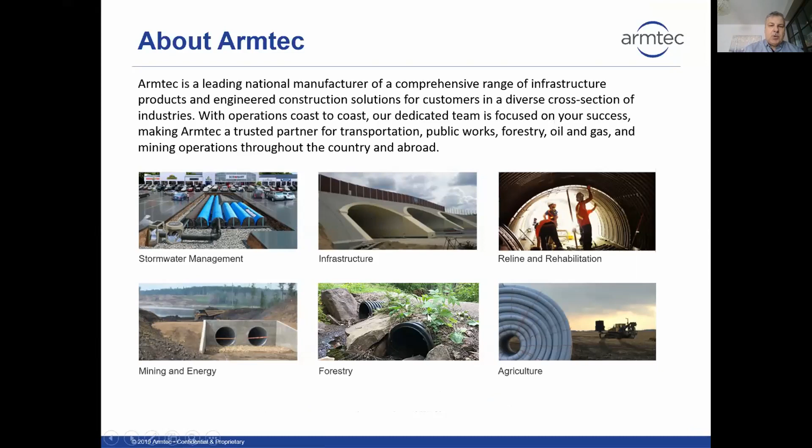Most of you know that we do supply culverts, highway guardrail, structural plate, and HDPE products, but today we're going to share specifically on our Bridge in a Box.

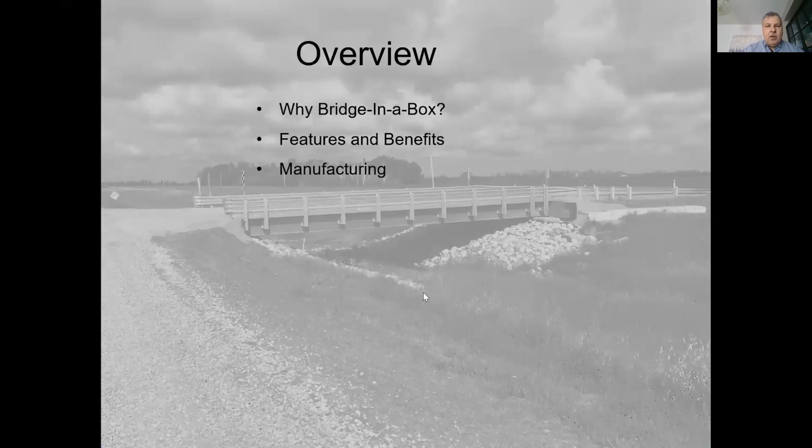Quick overview of what we're going to be sharing today: first, why Bridge in a Box, features and benefits. We'll talk about manufacturing, pre-engineered design, options, and meeting Alberta Transportation (AT) specs, as well as installation.

We'll share some case histories, touch on custom bridge capabilities, and lastly cover the RMA trade eligibility program.

So why Bridge in a Box? As we all know, aging rural bridge infrastructure requires solutions. Bridge infrastructure is deteriorating, and there are several bridges in our communities that need replacement or repair.

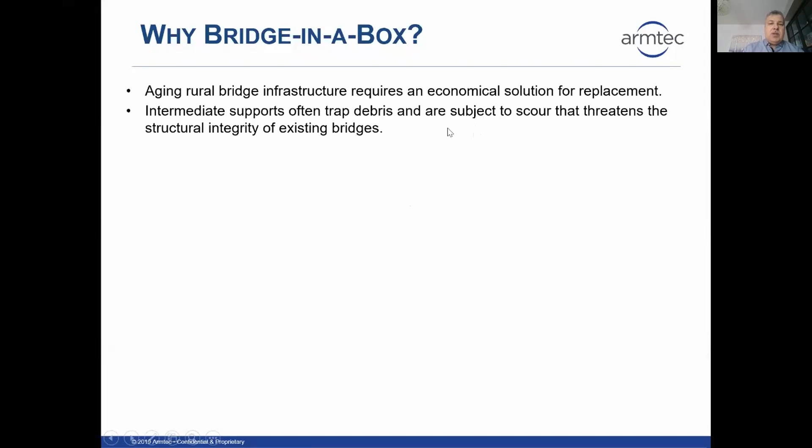We often hear from public works managers that they're dealing with issues where bridges have intermediate supports, and the clogging of debris and trees becomes a very expensive issue to deal with and resolve.

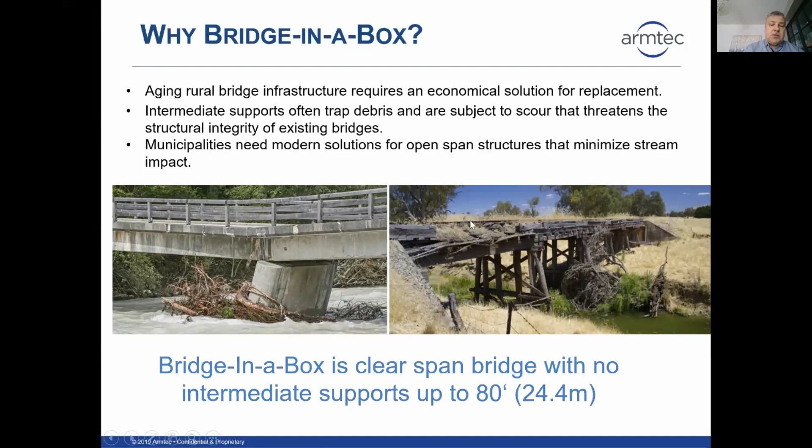Our Bridge in a Box is a solution we propose because it eliminates that intermediate support, with spans of up to 80 feet, or 24.4 meters.

Just to touch on some of the features of our bridge, the bridge is supplied in prefabricated steel modular sections. It also complies with the Canadian Highway Bridge Design Code. We can supply in single or double lane widths, and we offer various deck and railing options. Ideally, this bridge is suited for low volume roads.

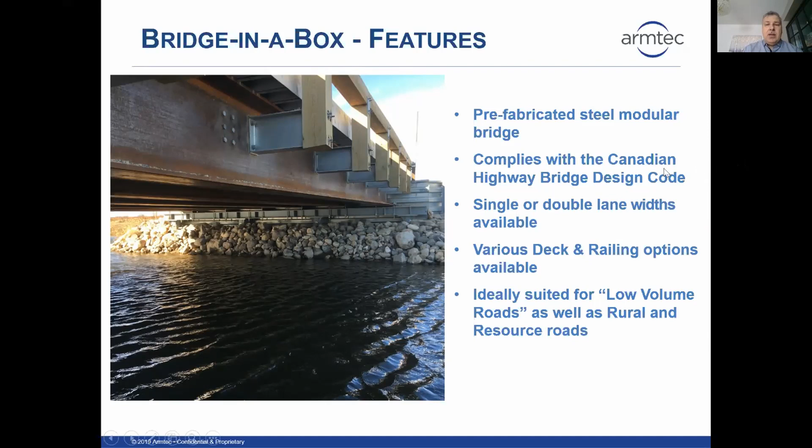It is not suited for major corridors or major roads, i.e. Highway 2 or Highway 43. So this is a perfect bridge for the RM and county membership.

Some of the benefits of our bridge in a box: because of the pre-engineered design, it will save on upfront design costs. We do the entire design of the bridge itself. It's modular and is shipped to site pre-assembled, so there's very little actual installation when the bridge gets to site. Typically, our bridges can be installed in one day.

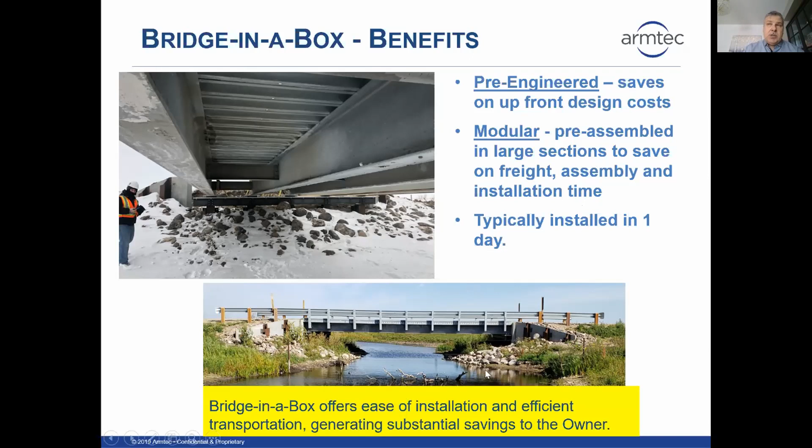The fact that it can be installed in one day eliminates a lot of need for heavy equipment and equipment sitting around at site for several days. It's efficient and generates substantial savings to the owner because of this.

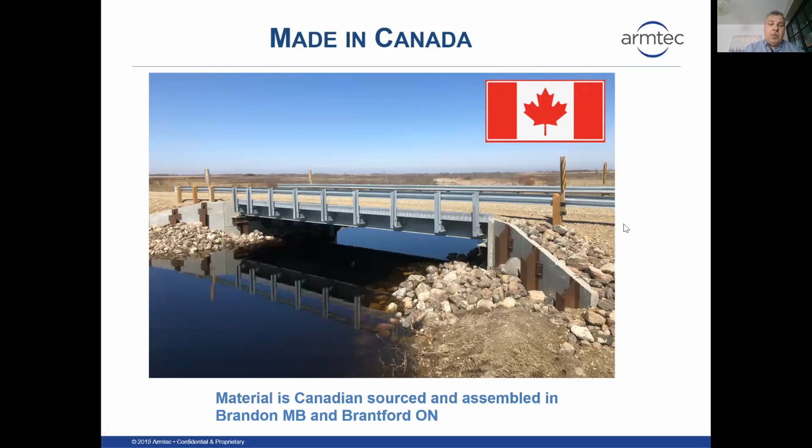The other fact we'd like to touch on is that our product is made in Canada. The material we source for our product is sourced in Canada and assembled in Brandon, Manitoba and Brantford, Ontario.

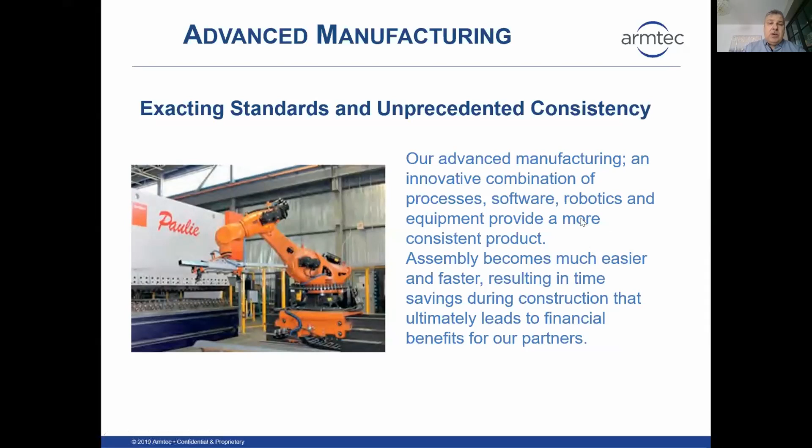We also use the latest in state-of-the-art equipment to manufacture our bridges. As you can see in the photo, this is one of our robotic machines used in the fabrication of our bridges. The standards we use are exact and unprecedented in the industry, and that's why our bridge can be manufactured and shipped to site with a very precise fit up.

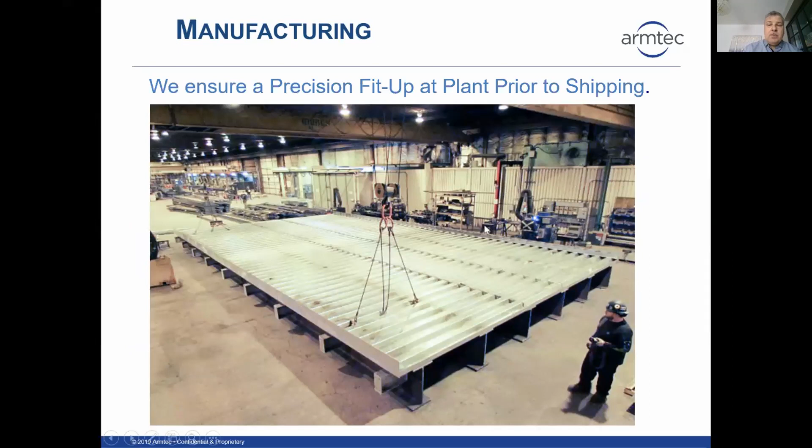We also do a test fit at the plant prior to shipping to ensure that the bridge arrives and is installed correctly to specifications.

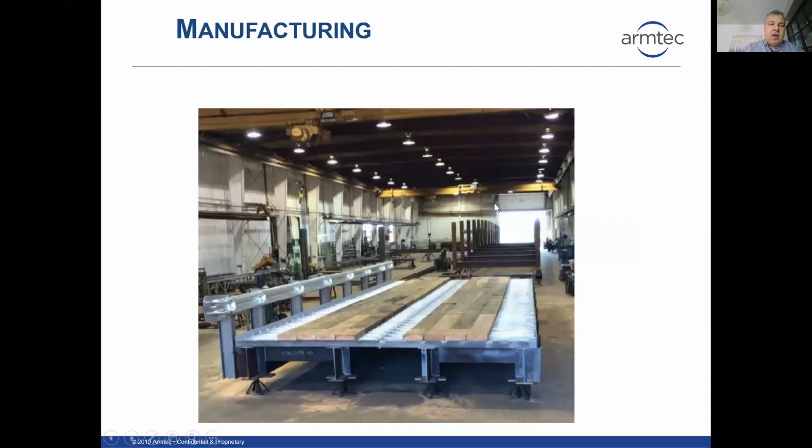Along with our manufacturing of the bridge, we also supply the highway guardrail on the sides of the bridge. This guardrail is also test fitted in our plants, again, for ease of installation on site.

In regards to design and engineering, Armtec provides in-house design engineering for our bridge. We can supply sealed shop drawings, complete shop drawings for your project. This slide shows some snapshots and screenshots of the different sections of our drawings that are supplied with each and every bridge we supply.

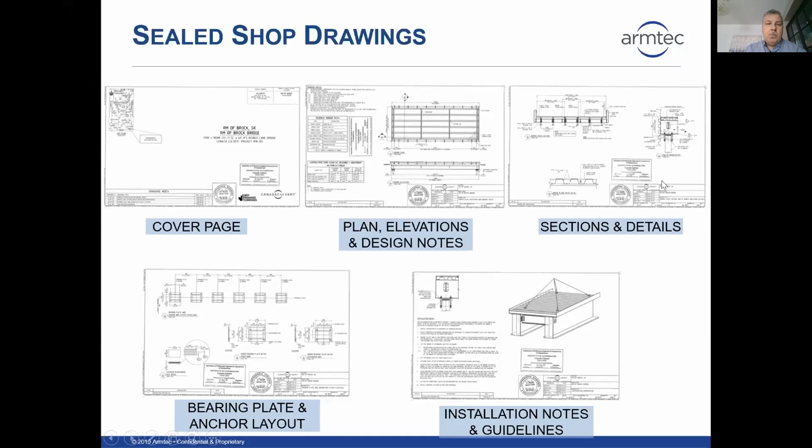Our bridge in a box also offers different options for decking. You can see the gravel on the side here. Also, concrete is another option, as well as asphalt or timber planks.

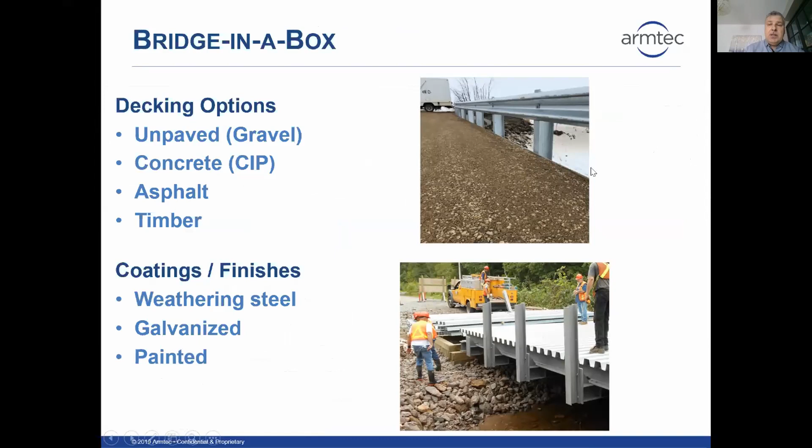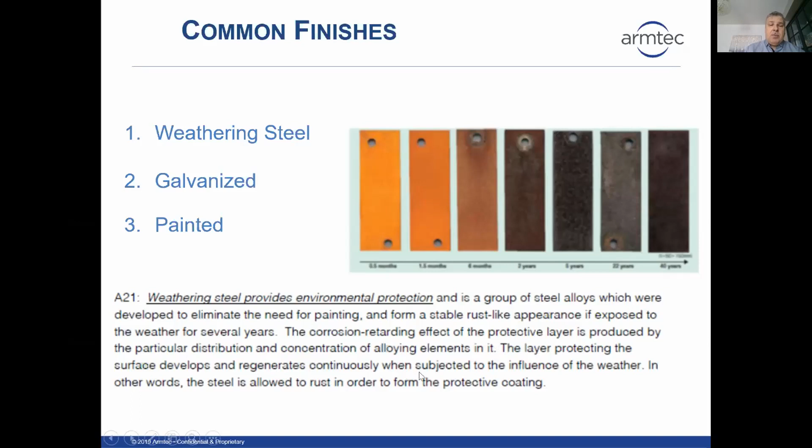We offer different coatings and finishes for our bridges. Weathering steel is probably the most common, but we can also supply galvanized and painted finishes. Weathering steel provides an opportunity for the steel to essentially weather over time, and this forms a protective rust layer over the top of the bridge.

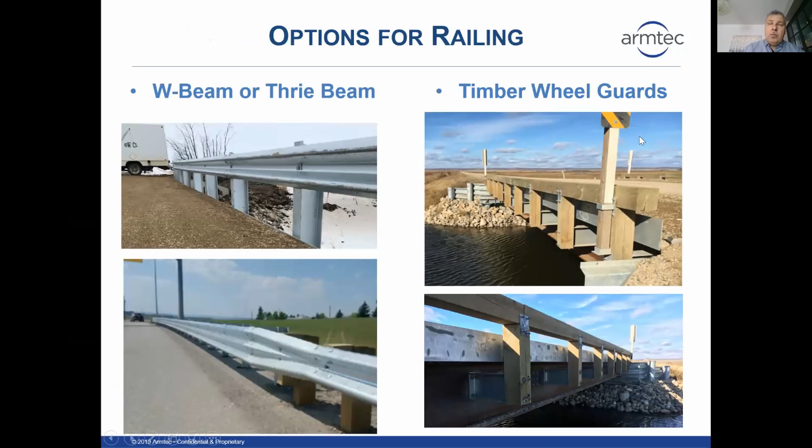We also supply various options for railing for your specific project needs. You can get W-beam or Thrie beam, or if it's more for a logging or resource road, we can and have supplied timber rub wheels or rub wheel guards for your project.

Armtec does provide design assistance but does not supply the abutments. We can provide solutions for abutments; however, this is the responsibility of the bridge consultant that the owner is working with. We will assist in the design, but we do not supply the bridge abutments.

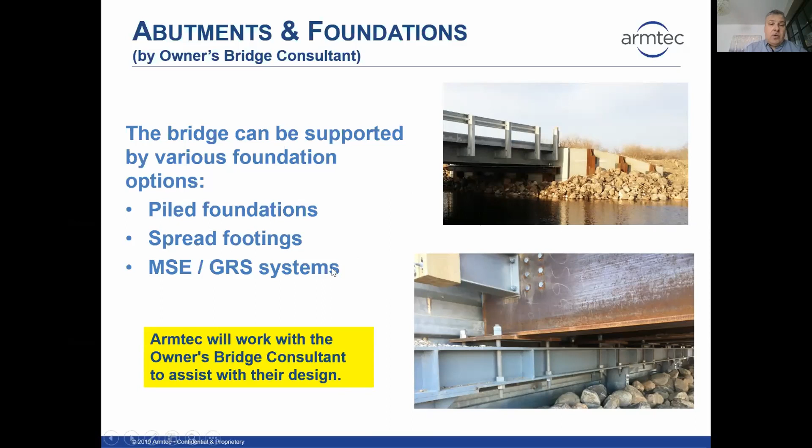The bridge can be supported by various options: pile foundations, spread footings, MSE and GRS systems, which is mechanically stabilized earth, or the GRS system.

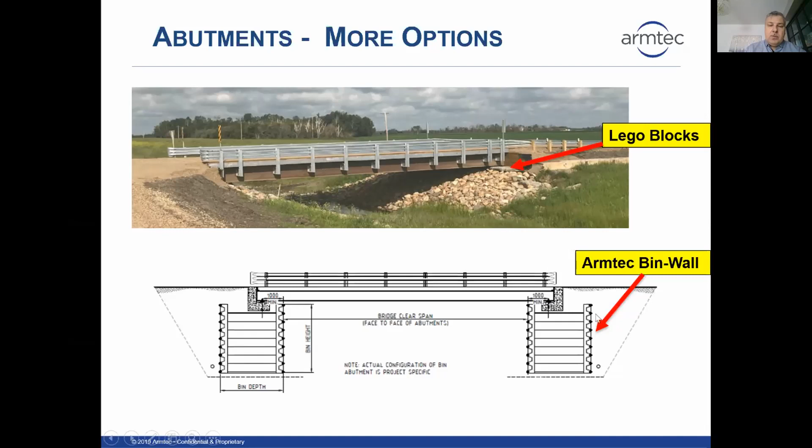Other options for abutments: this photo shows Lego blocks, which was a project up in Northwest Alberta. We can also provide the option for Armtec bin wall, which you see in this schematic cross-section below.

Here are some other photos showing other options for structural plate back wall and bin wall, different options on different bridges we have supplied in the past. Again, we don't do the design of the back wall abutment or the bridge abutment, but we can provide assistance and supply the material if one of our products is chosen.

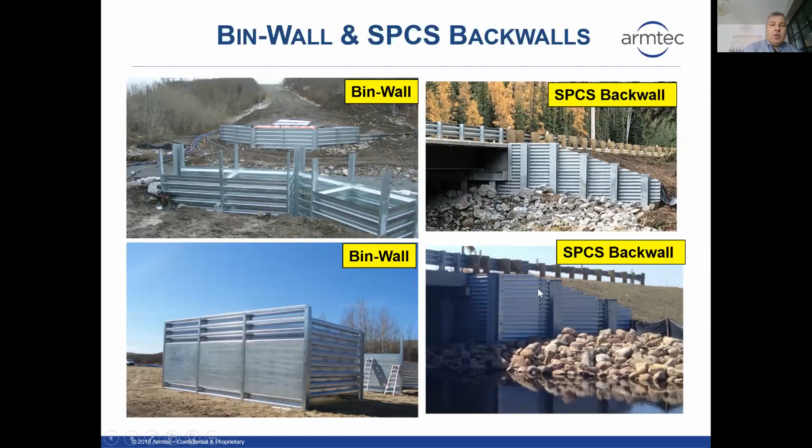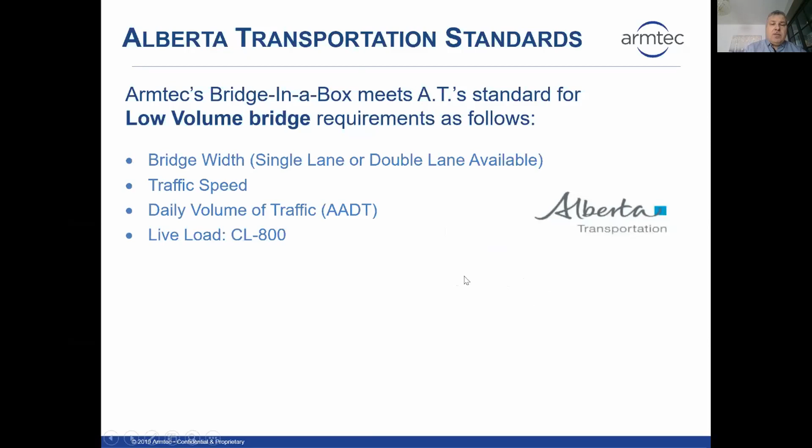Also wanted to touch on the fact that our bridge does meet Alberta Transportation standards. Armtec's bridge in a box meets the standard for low volume bridges, with respect to bridge width, single lane or double lane. It also meets traffic speed and daily volume of traffic, the AADT, average annual daily traffic. Also the loading: all of our bridges are designed to carry CL 800 loading, the same loading you would see on Highway 2 or Highway 43 throughout Alberta.

We can supply a bridge that can meet a heavier loading, and we'll touch on that later in the presentation. The guardrail system is supplied by Armtec, and it meets the TL1 system of guardrail.

We supply a turnkey system in the sense that the bridge comes complete. That's why we call it bridge in a box. Essentially, you take it off the truck and install it all in one day. The TL1 system meets Alberta Transportation's criteria for low-volume bridges, and we do supply and manufacture the W-beam guardrail in-house at our plant in Guelph, Ontario.

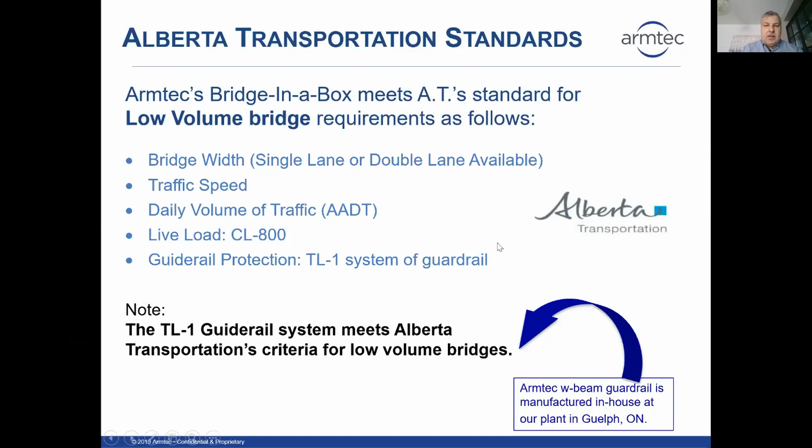Now I'm going to turn it over to Ron. He's going to share with you some installation case histories. So I'll just turn that over to Ron.

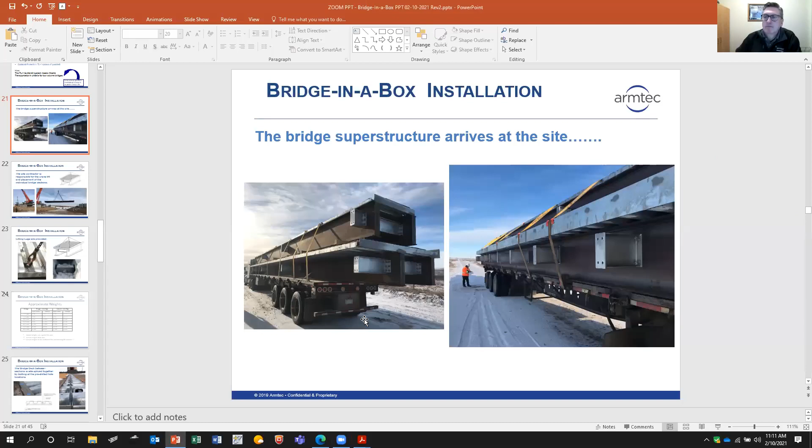Thanks, Frank. You just, yep, good. So Frank, I'm just going to ask you, can you see my screen all right? Yeah, you're all good, Ron. I'm good. Okay, good. Thanks.

Thanks everyone, and thanks Frank for asking me to participate today. I just wanted to show you some slides of a typical installation.

We ship this very efficiently on the back of flatbed trailers, as you see here. You can see two sections arriving at site, top loaded, one on top of the other. This particular bridge had 3 sections, so there were 2 truckloads coming to site. They're loaded specifically to ensure that when the crane unloads them, they get placed in the proper sequence or order.

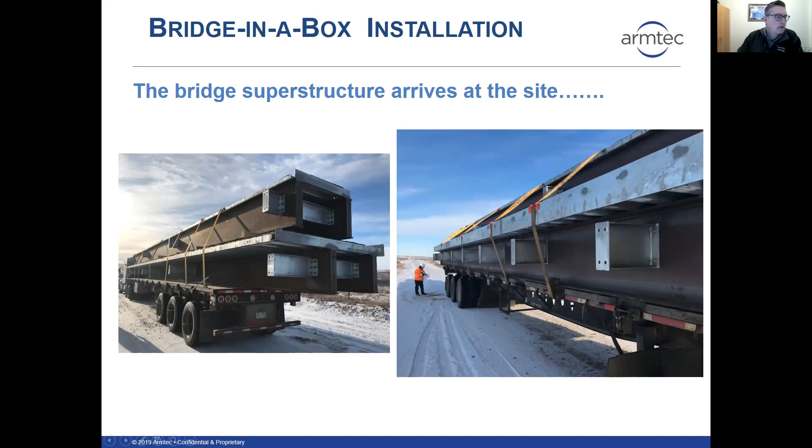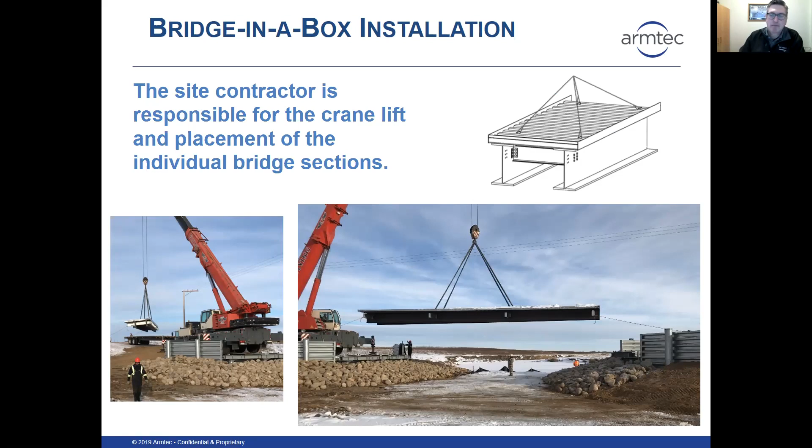Armtec is part of our drawings, and part of our work is to provide a lifting lug, suitably located for the lifts you see here. Every bridge is different, so it will be customized to that particular bridge at that crossing.

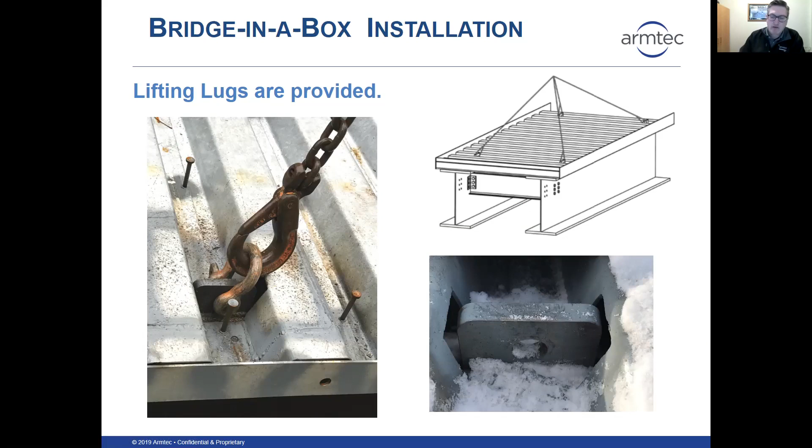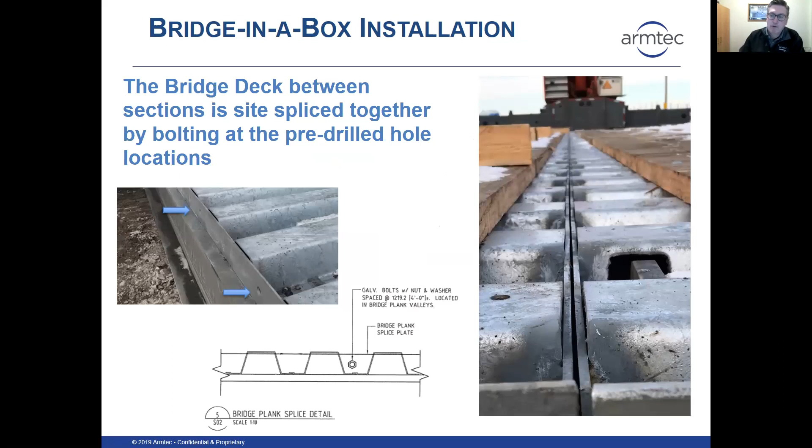There are also splices that are required. In this particular case, there were 3 sections. The splices are bolted on site. Once one of the holes lines up, the rest of the holes line up because, as Frank showed earlier, we test fit all of the pieces in our plant before shipping out to the site. So there's never a problem lining up holes and bolting this on site - very quickly and easily managed.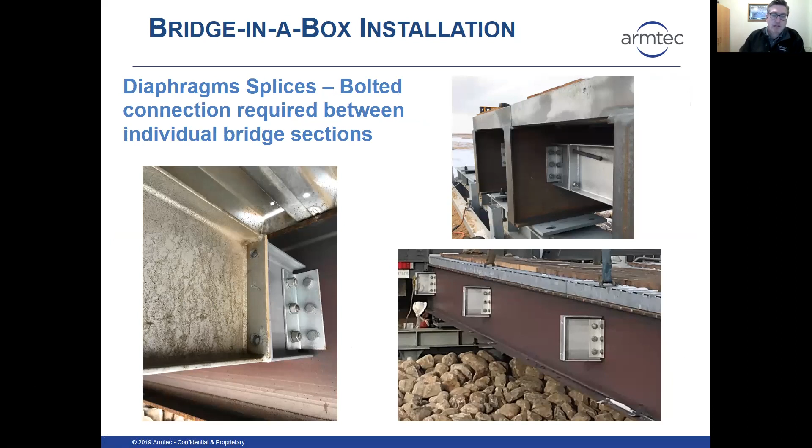Connecting guide rail posts is the next part of the job. We don't ship these sections with the posts installed, so this is another item that needs to be done on site - connecting posts and installing the guide rail system or whatever system is chosen.

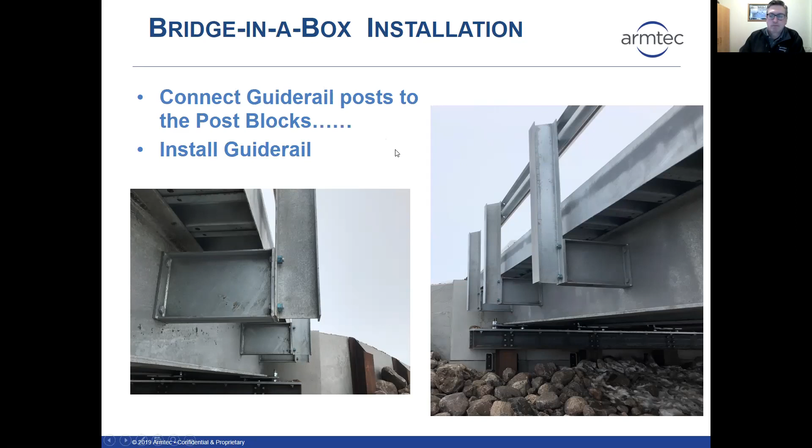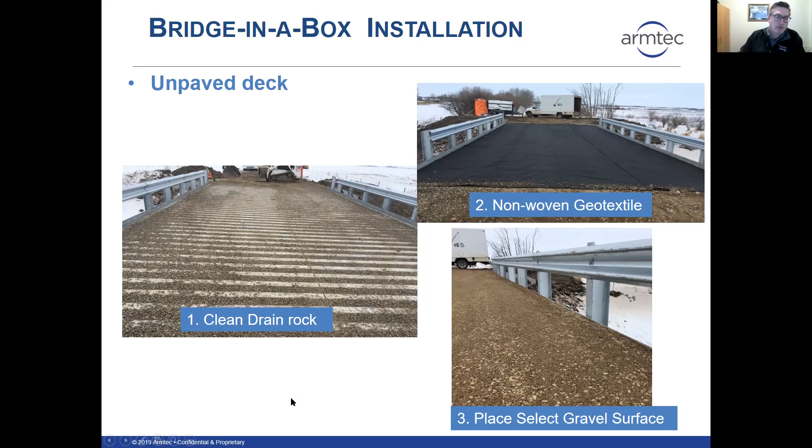Once that's done, it's a matter of installing the deck. In this particular case, this is an unpaved road, so the consultant chose to place clean drain rock in the top deck panels to ensure drainage. Then a non-woven geotextile is placed for separation before the final select gravel surface is placed and compacted on the top deck. The bridge is then ready for travel, assuming the approaches can be constructed at that point.

Here's a couple of examples. You've seen a few photos already out in Saskatchewan - this is the first installation by the municipality of Brock. You can see the wheel guards here, with a lot of agricultural equipment passing through this crossing. They elected to go with the wheel guards, and the signage can also be removed for passing wide equipment over the bridge.

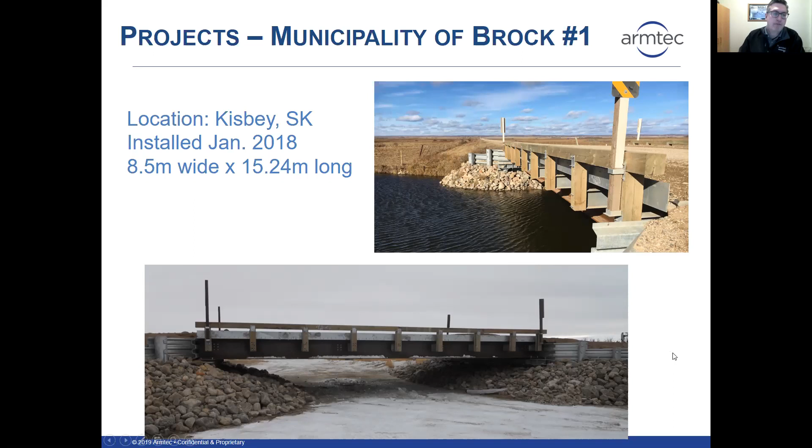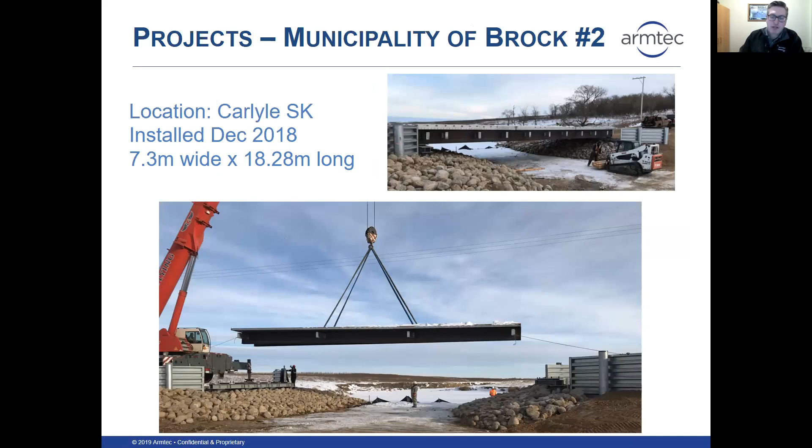Brock also did another installation later that year, close by - again showing you these footings or these photos earlier. Another installation in Manitoba is very similar to the Brock installation. If you look at the before and after pictures, this is very common of many bridge infrastructure right across the prairie. So this is the type of location application these bridges are specifically targeted to.

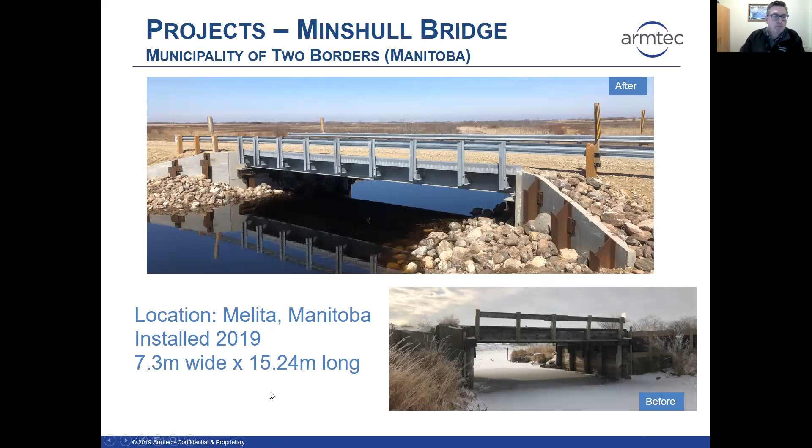At this point, I'll turn it back over to Frank. I'll stop sharing, and Frank, you can take over at that point and finish it off. Okay, thank you, Ron. I'll just share my screen here.

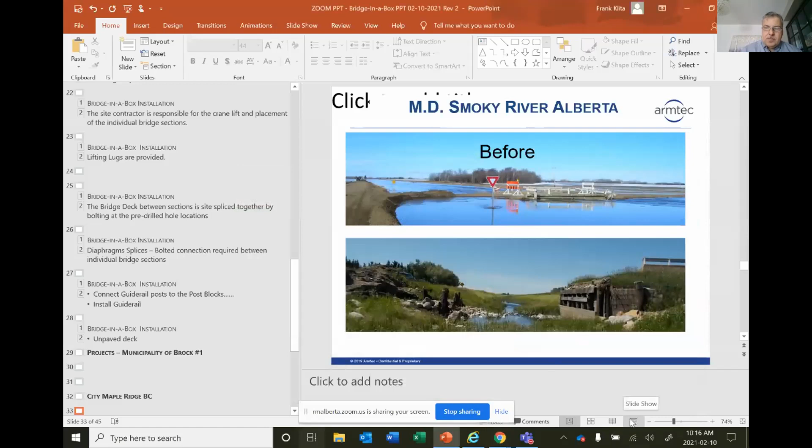Let me know if you can see this. Yeah, you're good, Frank. Go ahead.

I also wanted to share one last case history here. This was a project that I worked on back in 2019. Here's a couple of photos of the issues they were having with excess water at site and the grade of the original bridge. The superstructure is actually not shown here in this picture, so it's completely gone.

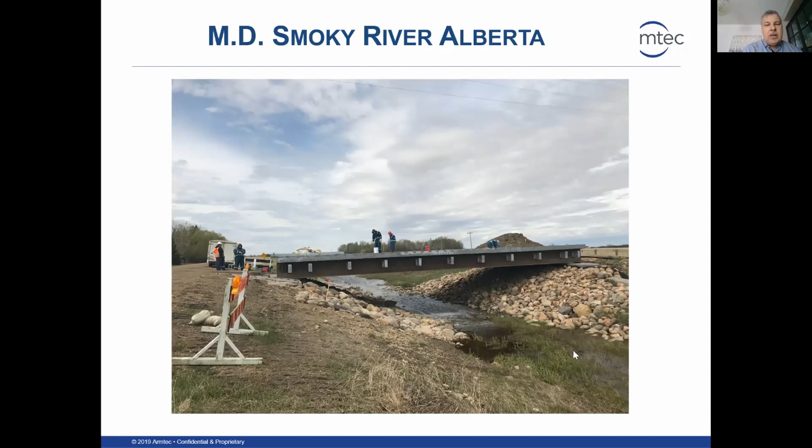But for this project, I remember heading out from Edmonton. It was 7:30 in the morning, and I was heading out to site with my phone to make sure I got the installation pictures. Well, I arrived at 11 o'clock, and essentially the superstructure was all done at that time. So it just goes to show how quick this bridge can really be installed.

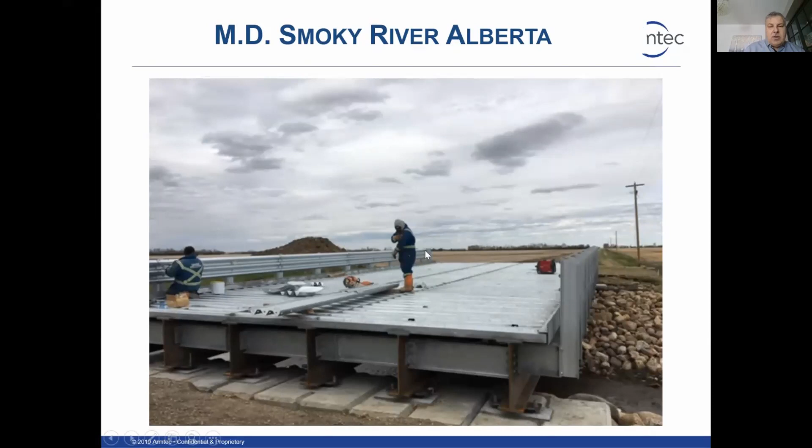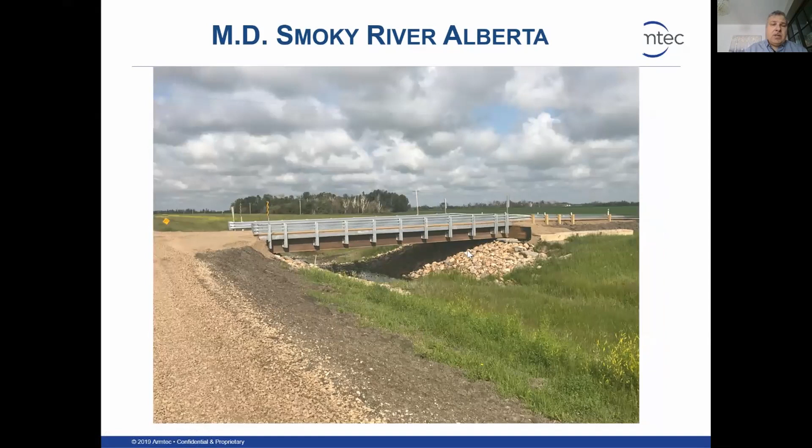When I got there, the crew was installing some of the other pieces on the bridge, including the guardrail. So it really went together fairly quickly. The final picture of the bridge is shown later on, midsummer, when I arrived at site again for some final pictures. And it certainly did turn out quite well, we thought. So I wanted to share that with you.

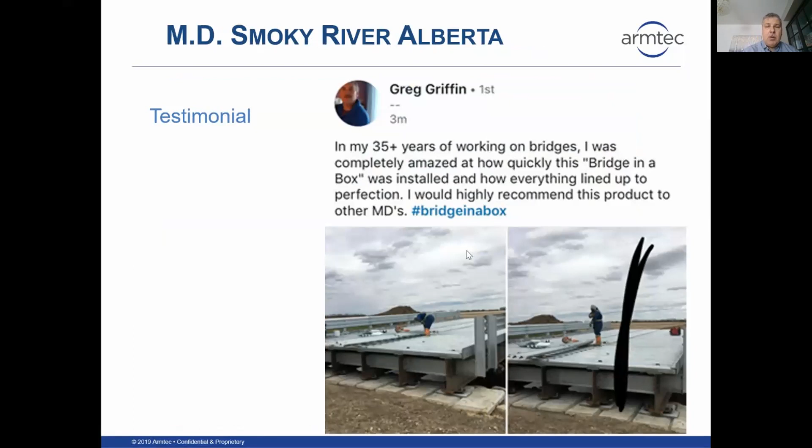And then the testimonial from Greg Griffin. Greg was the assembler on site, and he relayed these comments onto us as to how the bridge went together. So this speaks volumes, we believe, on how quickly and efficiently our bridge does go together at site.

So lastly, just to touch on some custom bridge applications - we've talked about using them for low volume county roads. The bridges can be used in different applications, such as this project at the Richmond Country Golf Club. This was a narrower bridge, only about 8 feet wide, 2.4 meters, 60 feet or 18.28 meters long. This was supplied with timber railing versus the guardrail W-beam railing.

So custom projects are something we can look at. It's just not one of our standard designs.

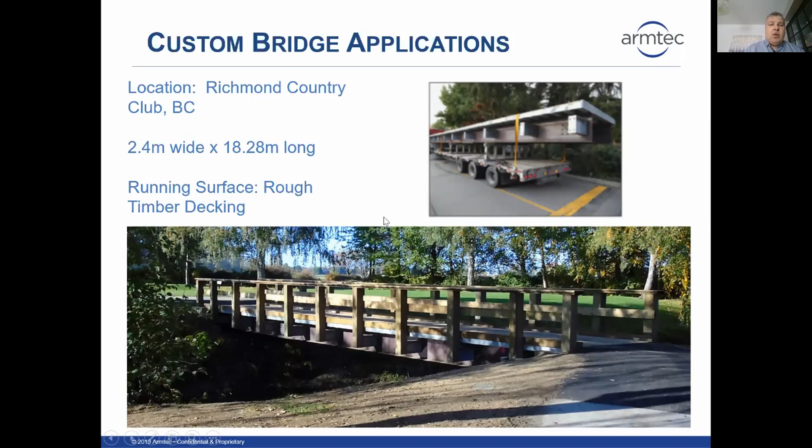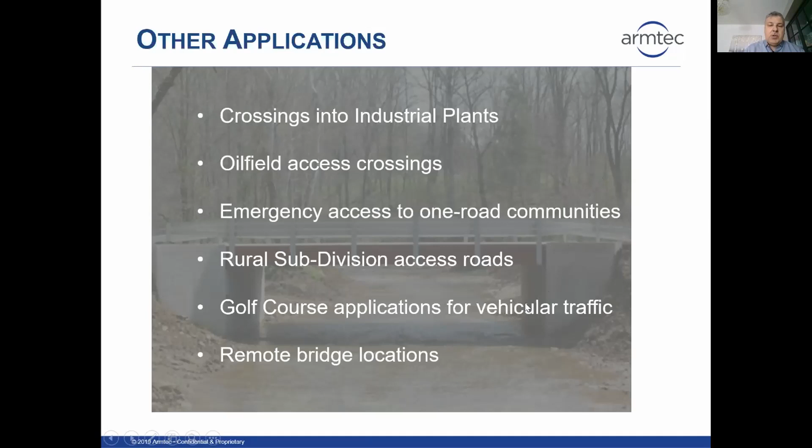Other applications include oil field access crossings or crossings into industrial plants. We've heard and seen of some communities, RMs and counties in Alberta that have subdivisions with only one road in, so emergency access for that second road - our bridge - would certainly be an opportunity for your project. Also golf course applications, and remote bridge locations, which are ideally suited to our bridge because of its modular style and the quick accessibility and installation.

So getting towards the end of our presentation here, we just wanted to confirm that yes, Armtec's Bridge in a Box is eligible for purchase through RMA Trade.

And I thought I'd put this out there - so why order through RMA Trade, and why not just tender the traditional way? Here's some thoughts I wanted to share as to why you might want to consider ordering through RMA Trade. First of all, utilize the buying power of RMA Trade to secure fair and often better than market value pricing.

Eliminate contractor markup, which inflates the supply price of the bridge. Eliminate bridge design engineering costs, which can really inflate the price of the bridge and can be quite substantial in some cases. We do all the bridge design and supply the stamped drawings.

Eliminate administration costs for the tendering process, and ordering through RMA promotes project timelines. As we all know, Alberta's construction season is not very long, sometimes only 4 or 5 months. So ordering ahead of time, bridge drawings can be completed and fabrication commences prior to contractor award - you can take advantage of pre-ordering due to the short construction season.

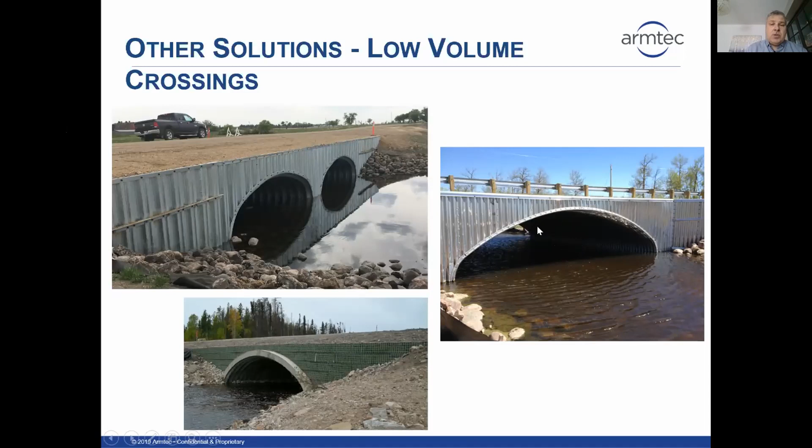Lastly, we wanted to share, just quickly, our other products - we do have the bridge option, but sometimes culverts and our large span crossings with structural plate are more suitable to your project. So please don't forget about these options if you're looking for a bridge. We'd be happy to help.

So if there's any opportunity that you might see of a bridge project in your county or MD, please feel free to reach out to myself and Ron. We would be happy to move forward with the preliminary design and preliminary pricing for you.

And lastly, before I turn it over to Tyler, we hope that you've seen something here in our presentation today that has piqued your interest. And if you have, our information will be shown at the end of this presentation. Do feel free to get in touch with us whenever the project requires.

Perfect. Awesome. Awesome, Frank. Thank you, Ron.